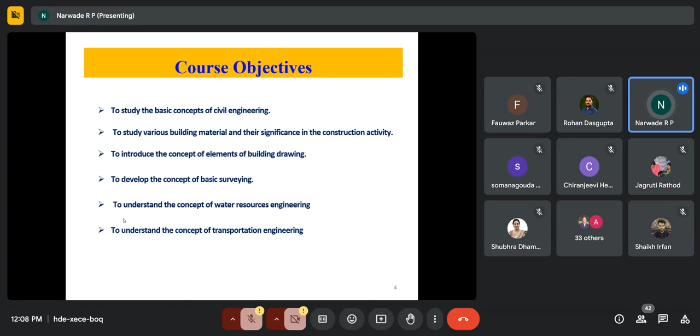Now let's start with the actual syllabus of the course. Module number 1 is an introductory topic, assigned 2 lectures. Here, only the basic concepts are covered - what is civil engineering, what is infrastructure engineering, and the definition and scope of civil engineering.

What is scope of engineering? In civil engineering, we have different specializations like construction engineering, structural engineering, geotechnical engineering, transportation engineering, and water resources engineering. Students should give detailed explanations about these specializations to civil engineering students.

Then early construction and development over time, and the evolution of construction techniques from ancient to modern times. You should give examples of old construction like the Taj Mahal, and sometimes examples from before BC, like Mohenjo-daro. All these examples you can give.

Next is advancement in construction materials and methods. Since this subject is just an introduction, you have to give brief information about all these advancements in construction, then the construction industry in comparison to other industries. We should compare all those industries with the construction industry, giving brief information to the students.

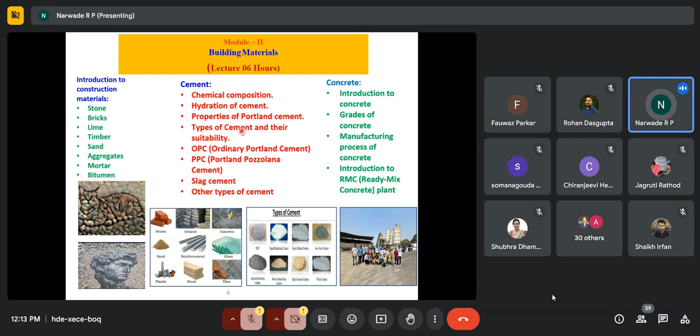So module number 2 is about building materials used in construction, and this is a major module. The weightage for module number 2 is up to 20 marks. Then coming to module number 3, which is about building drawing. So here you can see - am I audible?

Yes, sir. Yes, sir. Yes, sir.

Module number 3 is about building drawing. Number of lectures assigned to module number 3 are 5. This is again a major module from elements of civil engineering, and it has been divided into 2 parts.

The first part of module number 3 is about classification of buildings - different types like residential building, commercial building, high-rise building, multi-story building, skyscraper. You have to explain this classification to the students.

Then different types of loading acting on the building - static load, dynamic load, live load, dead load - everything you have to give brief information about this topic.

Then different building components and their functions - foundation, slab, beam, columns, staircase. You should explain the students with different components and their functions regarding module number 3.

Then nominal dimensions of the building and what signs and symbols are used. Different symbols are used in the drawing - there are symbols for windows, for doors, for walls, and for how to show the concrete structure. Everything you have to explain.

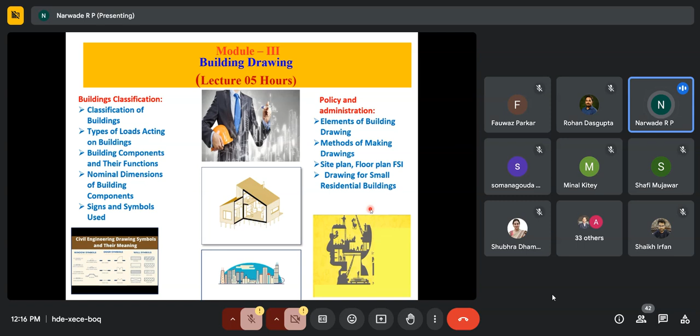Now drawing, students drawing for small residential building. You have to take a case study of any one small residential building and draw the drawing according to that.

Module number 4 - actually this is one of the major modules from elements of civil engineering. This is divided into 3 parts again.

What is the role of civil engineer in surveying, then classification of surveying. Some subject experts of civil engineering like Fauwaz Parkar sir, Gaude sir will give detailed information about that. But since this subject has been introduced at semester 2 at a basic level, you should explain classification of surveying, scale and mapping, field work, and how linear measurements are taken.

In angular measurement, students should be given information about bearing and direction, types of compass, then leveling, principles of leveling, and instruments of leveling. Some numerical examples can also be taught to them, and numerical questions can also be asked in the exam from this topic.

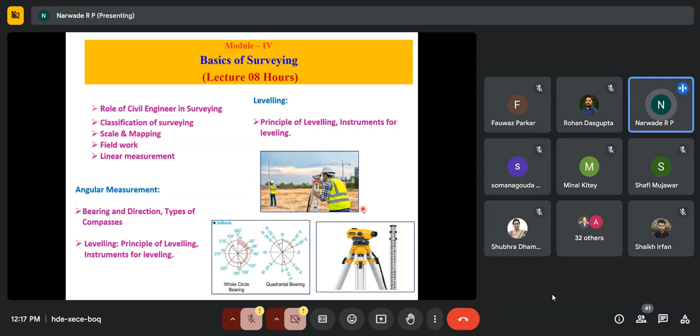The next is module number 5, water supply and sanitation engineering. Here we cover sources of water and quality of water standards. This module is again divided into another part about sanitary engineering.

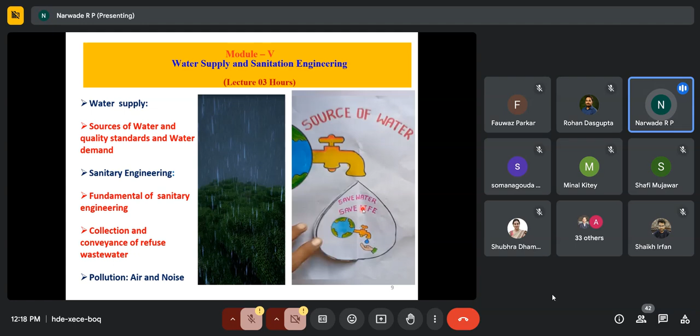You should give information about fundamentals of sanitary engineering, then collection and conveyance of refuse water. The third part of module number 5 is about pollution, and only 2 types of pollution are included - air pollution and noise pollution. So module number 5 is about water supply and sanitation engineering.

Now the last module of elements of civil engineering is about transportation engineering. Here students should get information about what is the role of transportation in national development.

Regarding the role of transportation, in India the metro in Mumbai region has 12 phases of work going on, also the bullet train project from Mumbai to Ahmedabad. You should give information about the latest construction projects in India and how these transportation projects help in national development.

Then you should give them information about the mass transportation system in India - metro train, monorail, local train, maglev train, high speed train like bullet train. Now new mass transportation includes ferries, cable cars, and aerial tramways. Give information about all types of mass transportation system at the basic level.

The second part of module number 6, the last module, is introduction to transportation infrastructure in India - here different types of highways are covered: national highway, state highway, express highway.

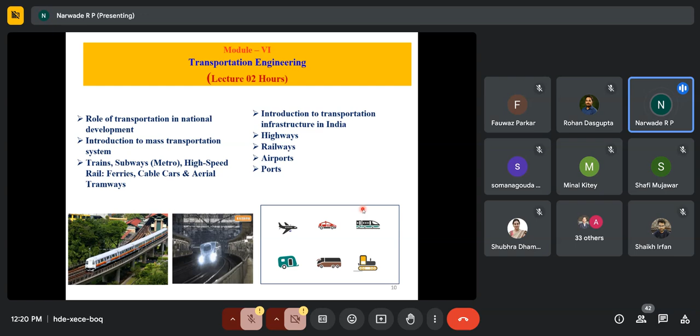You should give information about different types of highways and railways. I just explained railway, metro, bullet, maglev, airports and ports. So basic information about all these should be given.

After successful completion of these elements of civil engineering, the course outcomes have been framed in line with Bloom's taxonomy. Since this subject is introduced in semester 2, only basic levels are covered: remembering, understanding and applying. The first course outcome is that students will compare and contrast different branches of civil engineering in terms of their focus areas. This is Bloom's taxonomy level 1, understanding.

The second outcome is to analyze common building materials and...

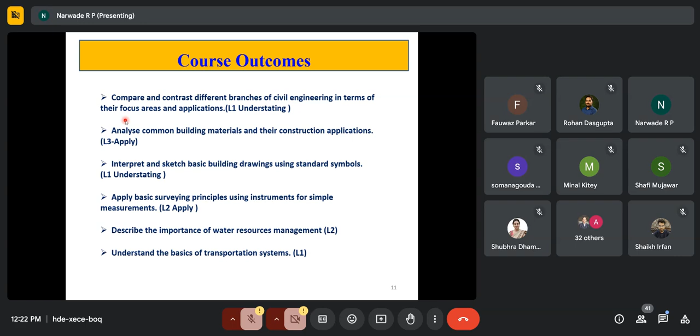Raju sir. Hello, Raju. Yes.

Now, question paper pattern. The weightage of each module will be directly proportional to the number of lectures mentioned in the syllabus. This clause was also there in R19 and R16. Again in NEP 2020, the weightage of the respective module will be directly proportional to the number of lectures mentioned in the syllabus. The question paper will comprise a total of 6 questions.

Sorry, here it will be 15 marks, not 20. By mistake I mentioned 20 marks, but it will be 15 marks each. Please note this down. Like the earlier scheme in R19 and R16, question number 1 will be compulsory and based on the entire syllabus. Students have to attempt any 3 out of the remaining questions. Please note, instead of 20, each question will carry 15 marks.

The remaining questions, question number 2 to 6, will be selected from all the modules, so questions may be mixed in nature. This is the blueprint of the question paper. After permission from the Board of Studies, this blueprint will be sent in the WhatsApp group.

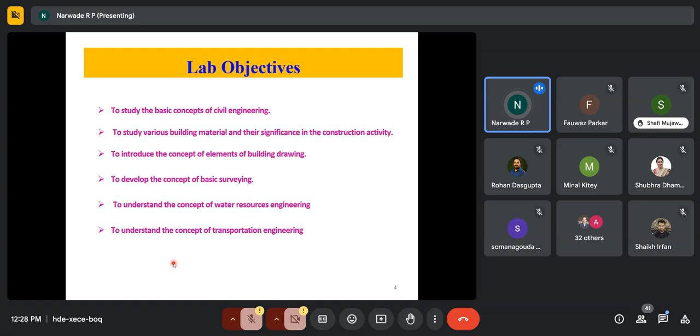Six objectives are framed in line with the Bloom taxonomy: to study the basic concept of civil engineering, to study various building materials and their significance in construction activity, to introduce the concept of elements of building drawing, to develop the concept of basic surveying, to understand the concept of water resources engineering, and to understand the concept of transportation engineering.

These are the outcomes, again framed in line with the Bloom taxonomy. Lab outcome: students can recall the fundamental role of civil engineers and list the core branches. Then explain the characteristics of common building materials and their typical application in structures. Third course outcome of the lab is to use standard symbols and sketch basic building drawings based on given interpretation and contract.

Next, they can compare survey instruments, and they can be involved in linear and angular measurements. The last lab outcome is about assessing the importance of water resource management in relation.

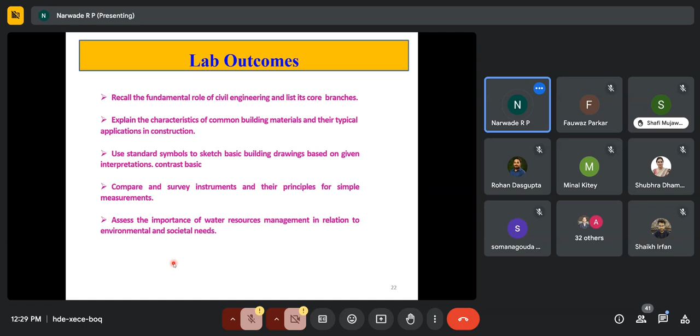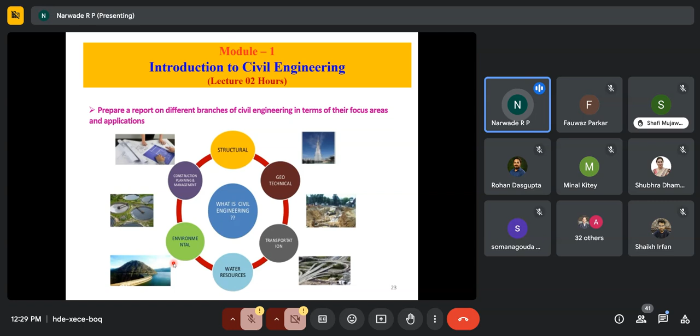So module number 1 is about this section of the lab. Students have to prepare a report on different branches of civil engineering in terms of their focus areas and applications. As part of term work, students have to prepare a report on different branches of civil engineering related to environmental engineering, structural engineering, geotechnical engineering, transportation engineering, and water resource engineering.

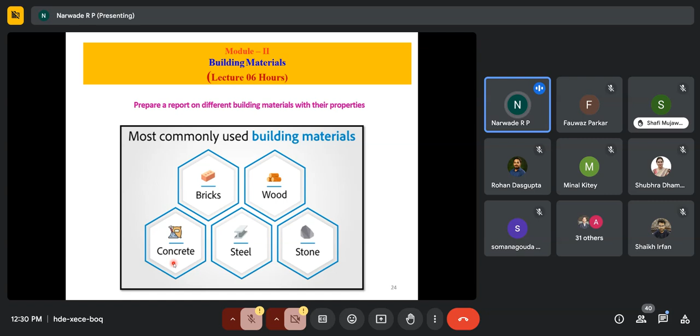Then again, students have to prepare a report on different building materials with their properties - most commonly used materials like brick, wood, concrete, steel, and stone.

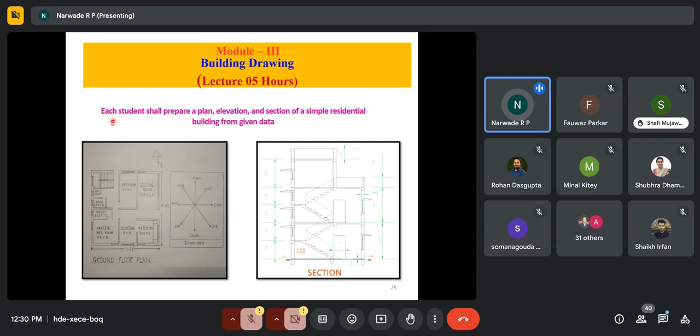The third part of the lab is each student shall prepare a plan, elevation, and section of a simple residential building from the given data. Each student - meaning this will be individual work - will prepare this.

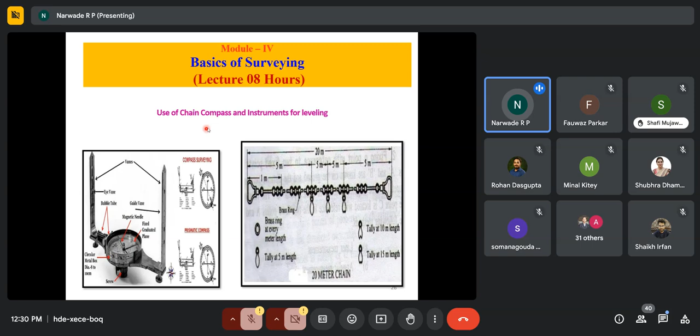Then some experiments can be conducted based on chain and compass surveying - information about the chain and compass surveying. So a few practicals are based on this.

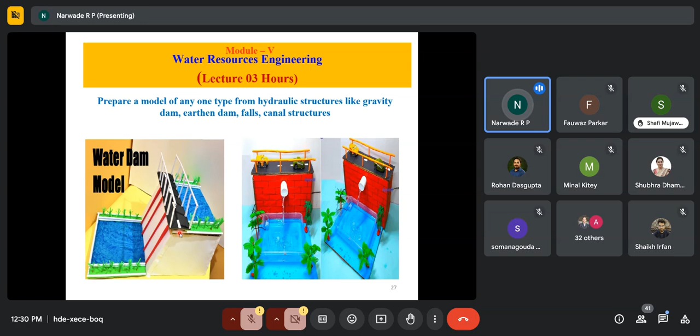The last part is students have to prepare models. Some models for representation have been shown here in the presentation. They have to prepare a model of any one type of hydraulic structure like gravity dam, earthen dam, falls, or canals. This activity can be in a group or individual, depending on the teacher.

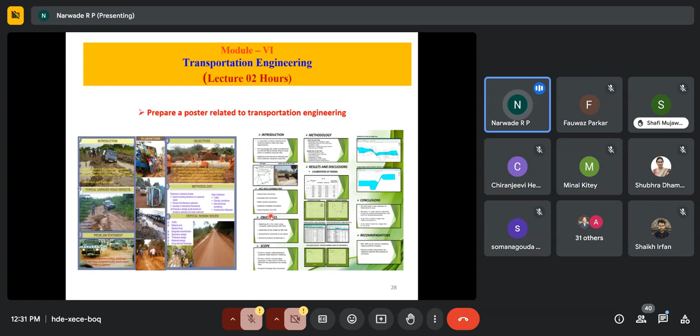Next, students have to prepare a poster related to transportation engineering. You can give them a format, like any other competition such as Aviskar competition. Students will prepare posters related to transportation engineering with format: introduction, objectives, scope, methodology - no result will be there since this is only a study project.

Now talking about the term work: it shall consist of at least 10 to 12 practicals based on the syllabus, and for term work they also have to submit journals. They have to write at least 2 assignments, and there will be 50 marks for term work.

What is the distribution of the 50 marks? 15 marks for experiments, 15 marks for assignments and posters, 15 marks for the model they have to prepare, and 5 marks for attendance.

Now students have to perform some experiments given in the list: initial and final setting time, compressive strength of cement, and they will prepare a drawing of a G+1 existing building.

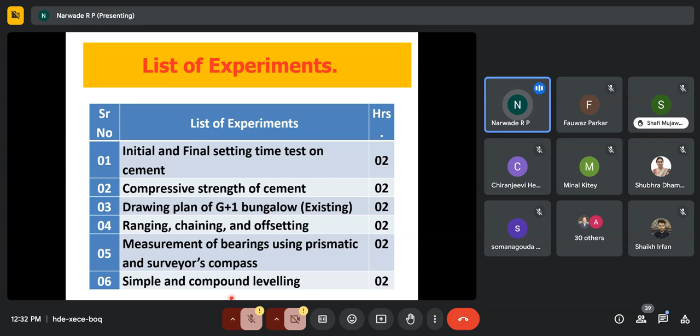Then experiments based on ranging, chaining and offsetting are also there. Then measurement of bearings using prismatic and surveyor's compass, and simple and compound leveling. Some experiments based on these points can be conducted.

Students have to write at least 2 assignments. This is to enlist in detail the scope of civil engineering based on different disciplines in civil engineering. Then students will prepare a detailed report on 3 civil engineering projects of national repute, like Samruddhi Mahamarg, Mumbai-Delhi corridor, the upcoming Navi Mumbai International Airport, and other upcoming projects.

Then they have to discuss the hydrological cycle and water supply, and comparison of different modes of transport.

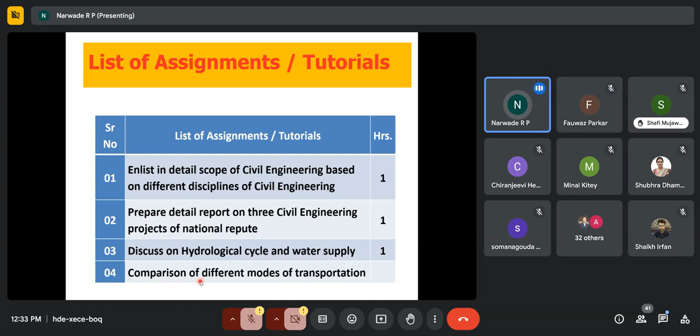Thank you everyone. Now, other experts are also there, and they will give their opinion.

Thank you, Rohan sir. Thank you, sir. Thank you, sir.